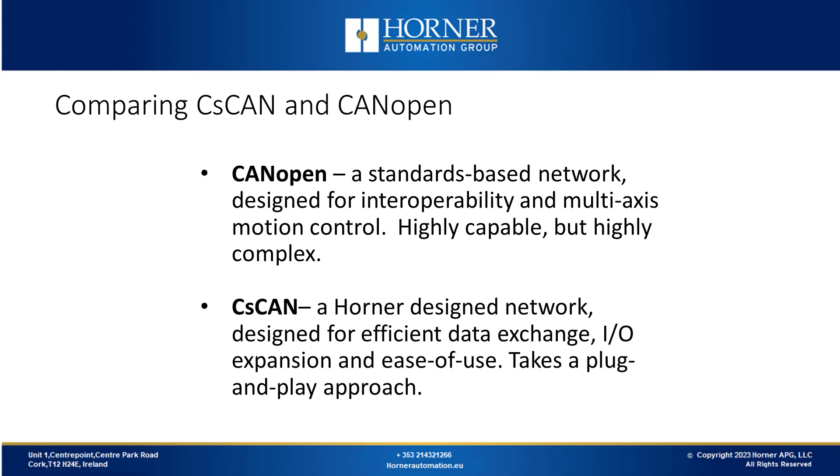CANOpen is a standard communications network that's based on the CAN chip. There are plenty of networks based on CAN, for example J1939 in mobile and automotive applications, and there's also the Horner CsCAN network, which is used for adding I/O to OCS or having OCS communicate with each other over the network. As we compare CANOpen with CsCAN, we can see that they were designed with two different things in mind, as CANOpen is a standards-based network focused on having components from multiple manufacturers talking to each other, whereas CsCAN was focused on getting Horner components to connect as easily as possible, a plug-and-play approach.

Now we'll look at the benefits of CANOpen with OCS. Interoperability is the main focus of CANOpen, so if you have a sensor or an encoder or a smart motor that you want to communicate to, CANOpen would be a good choice. It's good for motion control because it has a lot of capability at a fairly low cost when you compare it with other networking choices. If you're looking at adding I/O to an OCS or having OCS communicate with each other, CsCAN is the best choice as it's plug and play.

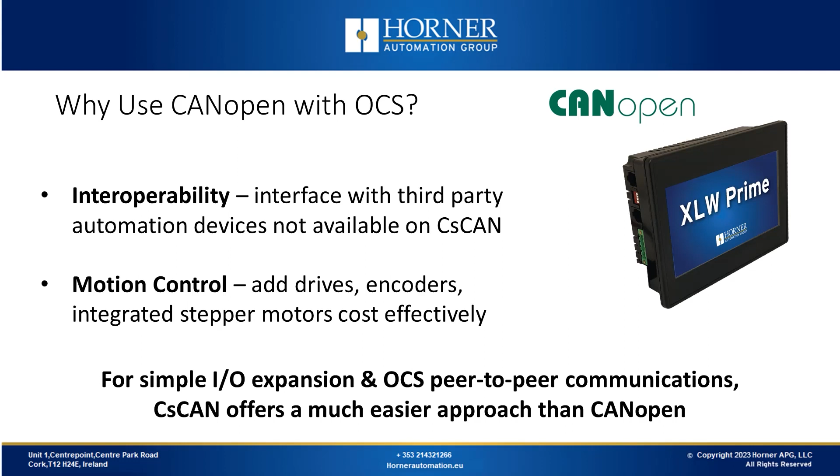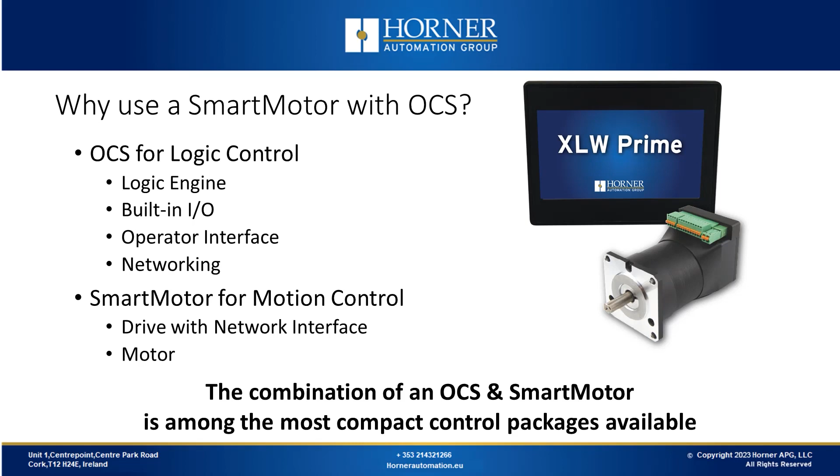Now we'll look at why a smart motor and an OCS work well together. If you take a look at the level of integration on an OCS, there's a logic engine with built-in I/O, operator interface and networking in one compact package, all configured with the same software package. If you look at smart motors, there's the motor and the drive with the networking interface, all built into one component. It's also highly integrated. So it doesn't take a lot of complex integration to interface these two components and to provide a complete system with a minimum of components.

Now we'll look at the different options when interfacing a smart motor with OCS. You could use the more old-fashioned step and direction approach, or you could go with a Modbus serial approach. These are both cost-effective and will both work well, but if you're looking for the next level of performance, CANOpen would offer that. There are some other options as well. In some cases, these other options might seem a bit easier from a configuration point of view, especially when you're talking about Modbus TCP. However, those options generally come at a premium. When you look at smart motors, you'll find the Ethernet options are more expensive than CANOpen.

The two CAN-port versions of the XL series OCSs, like the XL7 and the EXL10, support CANOpen as standard and have done for years. So if you have an EXL10 or an XL10 Prime, or an XL7 or an XL7 Prime, those have CANOpen available on the second CAN port. You can order CANOpen as a factory option for all the XL series and XL Prime series products that have a single CAN port. That's also true for the X5, which currently is the only micro series product that supports CANOpen.

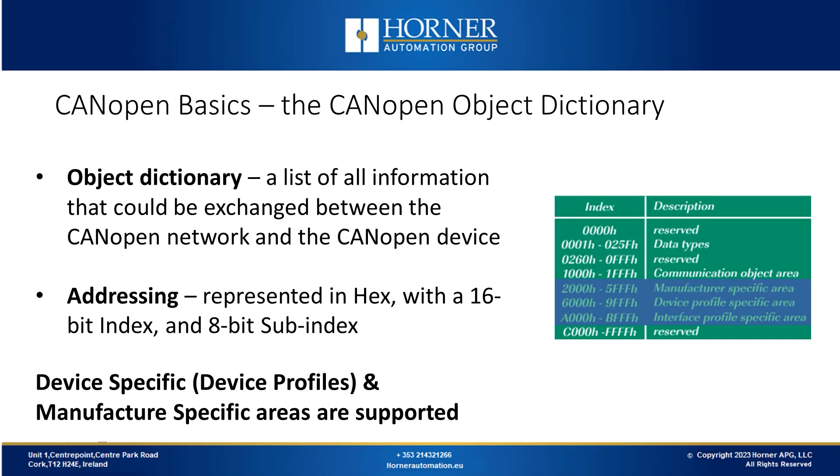Now we'll look at some of the CANOpen basics, starting with the object dictionary. The object dictionary is just a list of parameters. A lot of variable frequency drives that, for instance, have Modbus support will have a list of their parameters along with a list of Modbus addresses. One thing that's a bit different with CANOpen is that it uses hexadecimal addressing, and it's not just an index, which is the equivalent of the address, but it also has a subindex, so it's organized a bit differently.

Now we'll look at the different protocol types that are available as part of CANOpen. Starting with network management, which is a way for the current state of the network to be managed. It's usually managed by the master on the network, which in this case is the Horner OCS, but the network state can be one of several choices. When a network comes up, it's in the initialization state, then it's pre-operational, then it goes operational, which is where it does most of its work. And then if something goes wrong, the network will go down and be stopped.

Heartbeat protocol is used to determine the health of individual nodes. So that's a protocol that's used over CANOpen for that purpose. And then there are different types of messages that are used to exchange data. There's a service data object, or an SDO, which is the message structure that's used to transfer messages as needed. So they're not sent on a continuous basis; there might be a parameter and you need to change that on an occasional basis, then you can use an SDO for that.

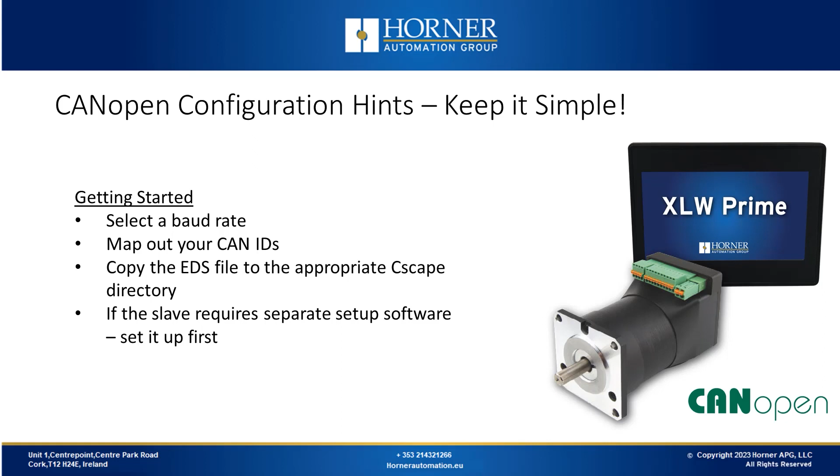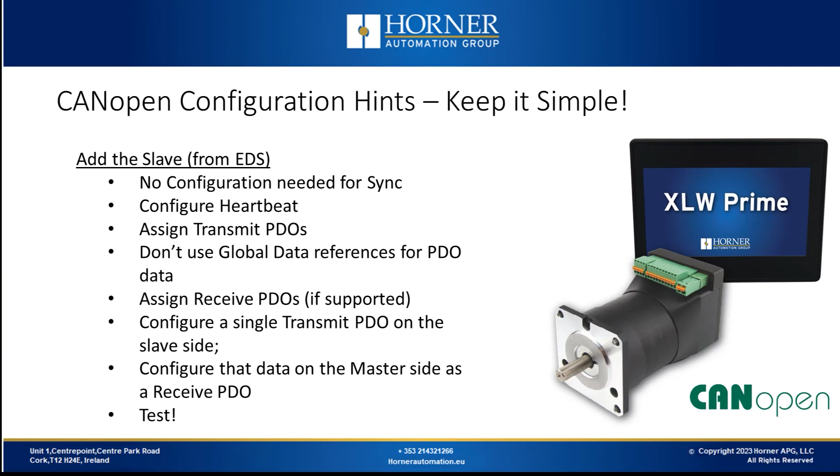Firstly, select your baud rate and your CAN ID. Map those out, and you're going to make sure you get your EDS files gathered up and copied into the appropriate directories. If your slave that you're configuring, like a smart motor, has its own software for configuration, you should handle that first. And then once you go into CANOpen configuration on the OCS side, which uses Cscape, then you're going to have a series of steps we're going to go through. And we'll demonstrate those for you here in a minute. And again, the key is to configure a certain number of items and then do the testing.

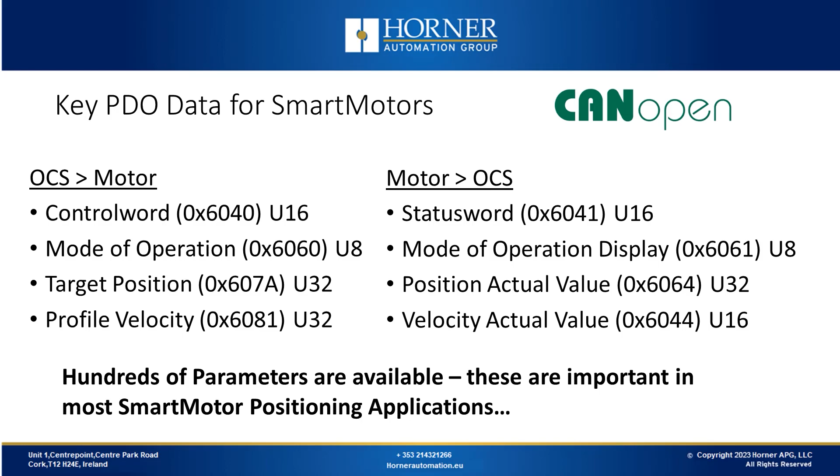Now with smart motors, because there are standardized profiles available in CANOpen, one of the advantages is that a lot of the data addresses are standardized. So when you're talking about interfacing an OCS with a smart motor, especially if you're talking about positioning control, maybe you're going to move an object across the x-axis or something like that, then you'll find that the data is going to be the same from application to application. So what we have here is some of the data that is going to be important for a typical positioning application. With CANOpen now, there are hundreds of parameters available, and we're looking at the ones that are most requested and most required. Now we'll go into Cscape and we'll look at how to configure a smart motor.

Here we have an already configured application which we'll review shortly, but first we'll open a new application, and we'll look at how to do this from scratch. So we select new, then we use a register-based approach for this example. So we have a new application that's blank, and we're going to start from the configuration area. We're configuring an XL7, and one of the advantages of the XL7 is that you can have CANOpen support available as standard on port 2. So we'll select CANOpen on port 2 and press the configuration button. And now the OCS can act either as CANOpen master or as a slave.

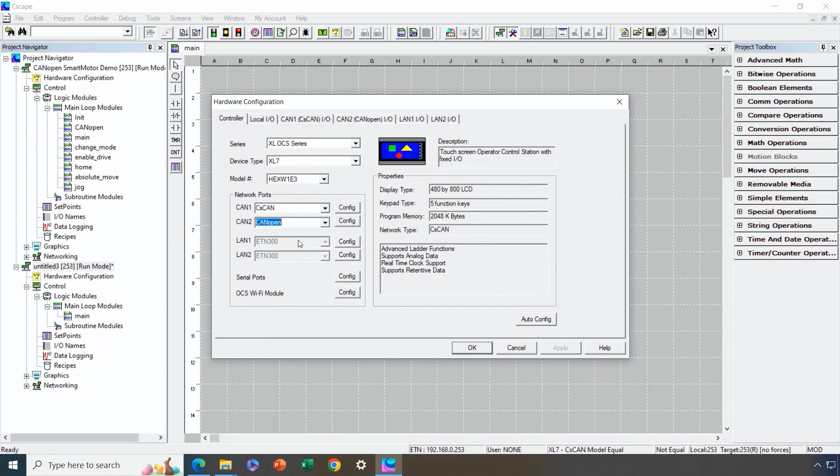And when you're dealing with a smart motor, the OCS is going to be the master. So we'll select that. And then we get into the configuration. So we'll start by configuring the OCS as a master, and then after we get to a certain point, we'll add in the slave, which will be the smart motor.

We recommend that you use the defaults for ID and baud rate for the slave that you're using if those will work for you. So the default with the Nanotec SmartMotor is an ID of 1, which means we don't want the master to have an ID of 1. So we'll assign 127 as the master ID. The default baud rate for the motor is 1 megabit, and if the network is less than a few meters, that's not going to be a problem, and this network is, so we'll do that as well.

For configuration, we'll just look at how generally you're going to configure the minimum. So one thing we'll check is the perform NMT, which is the network management that we talked about. So the OCS as master is going to be responsible for the network state, and so we want the OCS to automatically start the network to put everything into operational mode. So we make that check mark.

The only other thing we want to configure here is a status register, so we'll assign %R1 to that. We're using register-based logic here and will require 4 consecutive word type registers for the master, and then for every slave there'll be another 16-bit word as well. Now there are lots of other things to configure, so we'll go through that now. Under device type, that's just informational and there's nothing to configure there.

For special function objects, we only need to configure this if we're going to use the sync protocol. Remember, the sync protocol is an optional approach where the master can send out a sync pulse periodically that all PDO messages are timed with. So here we want the master to generate the sync message, then all that is left for us to configure is how often the sync message goes out.

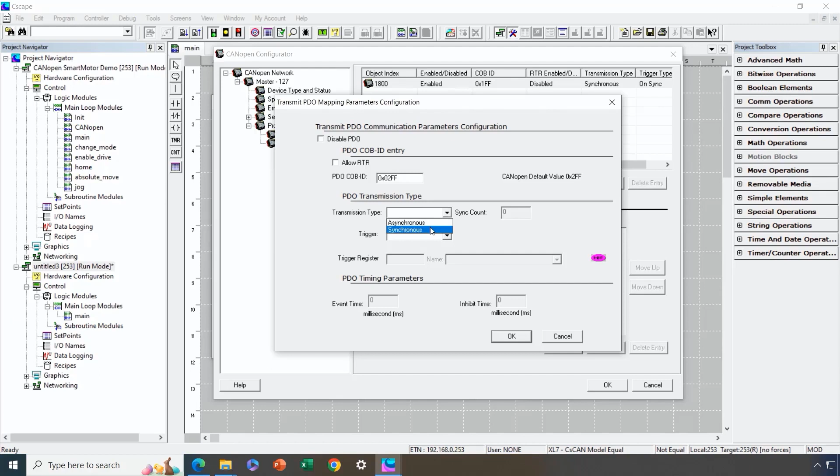Now we'll add the SmartMotor, so we press the Add Slave button here, and then that starts the slave configuration wizard. The node ID of the slave is going to be node ID 1, which is the default for the SmartMotor. Then we'll load the slave from its EDS file, which we've previously loaded into Cscape in the appropriate directory, and so we'll utilise that. So we'll press the next button here.

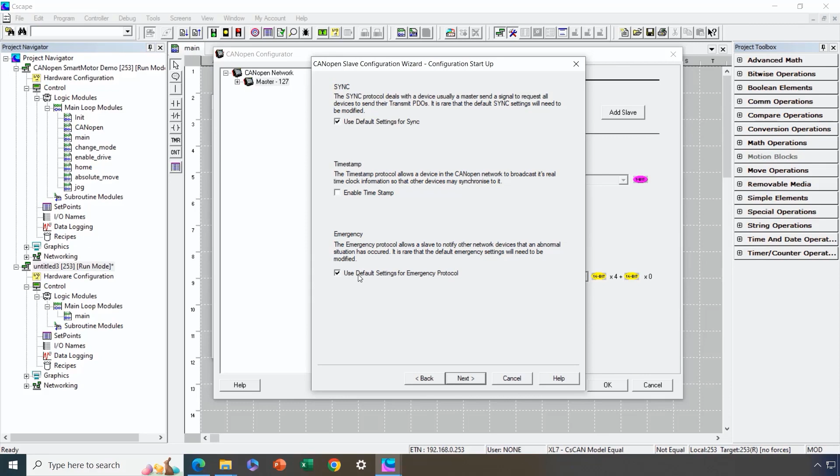So we want to use the default settings for sync, and we don't want to do anything with timestamping. The default settings for emergency protocol are also okay. And then from a heartbeat standpoint, just like the master, we'll have the motor generate a heartbeat every 500 milliseconds, and we'll check from the master node, which is 127, to make sure we receive a heartbeat at least once per second. So that's how we want to configure the heartbeat monitoring.

So we want to have the standard object IDs supported for SDOs, and then we do want to have a couple of transmit PDOs with the motor, so we'll set that at 2, and we could go up to 4.

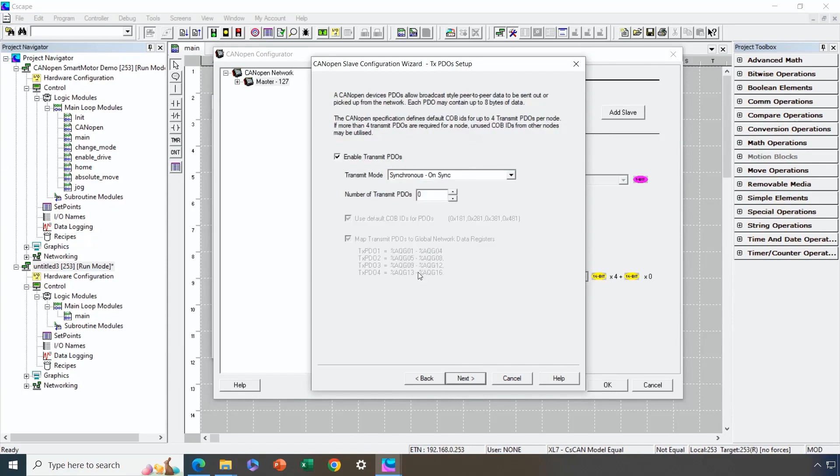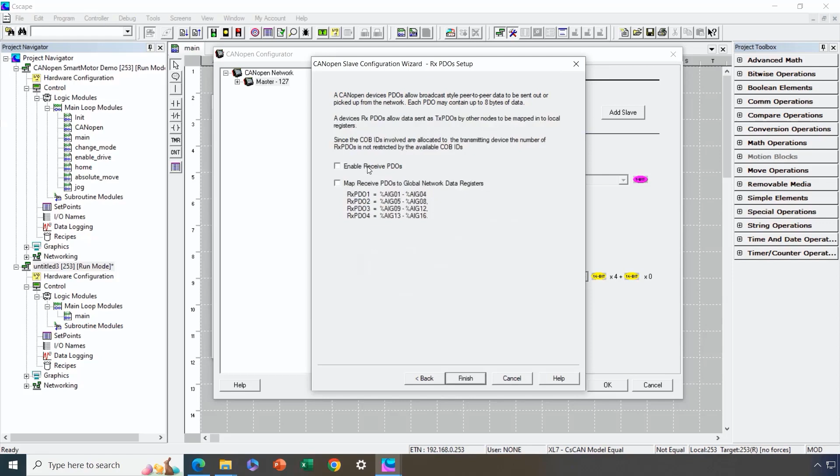We'll use the standard object IDs again as much as possible. For mapping data back and forth, we prefer to just use standard %R registers rather than global mapping, so we'll uncheck that option. We do want to be able to receive PDOs from the master. In this case, remember, we're configuring the SmartMotor. And again, just like on the data going the other way, we usually like to avoid global data. So we'll press the Finish button now.

So once the EDS dialog pops up, now we can select the manufacturer of the device we're adding, and that's Nanotec. The device is the PD4, and profile is the only one available here, so we'll say OK, and now the Nanotec SmartMotor has been added. So now we'll configure the details for that. Firstly, we'll make this a mandatory slave, which means if the slave is powered down, we won't send the CANopen network into operational mode because there's no point as a critical slave is not up and available.

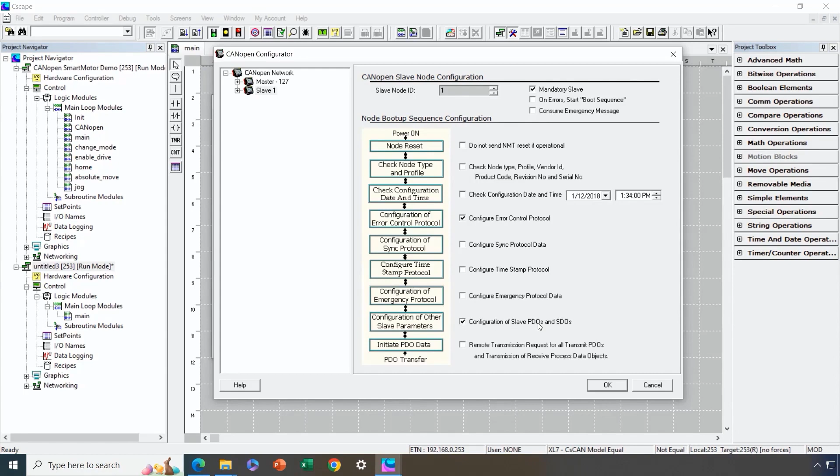Up here are all the different services which could be enabled. The only ones we'll enable are the error protocol, the PDO and the SDO configuration. This means that we're able to, from Cscape, tell the SmartMotor what data we want to exchange using PDOs. So those are the only two we'll configure on this page. And just like the master, there are other pages to configure. So nothing here on device type as it's just informational.

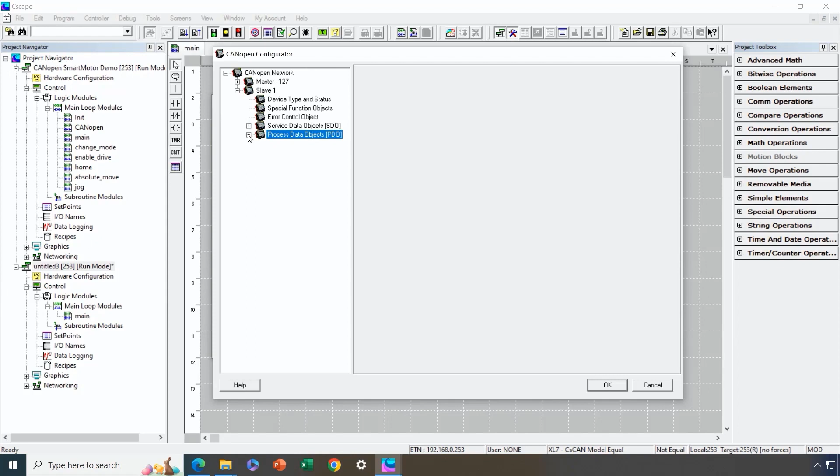For special function objects for the master, we had to configure sync, but as a slave, we don't have to configure anything. Error control object is already set up because the wizard set it up, so we're generating heartbeats every 500 milliseconds, and we're checking to make sure the master, as node 127, has sent us a heartbeat at least every 1000 milliseconds. There's nothing to configure under service data objects or SDO messaging. Now we'll look at the PDOs.

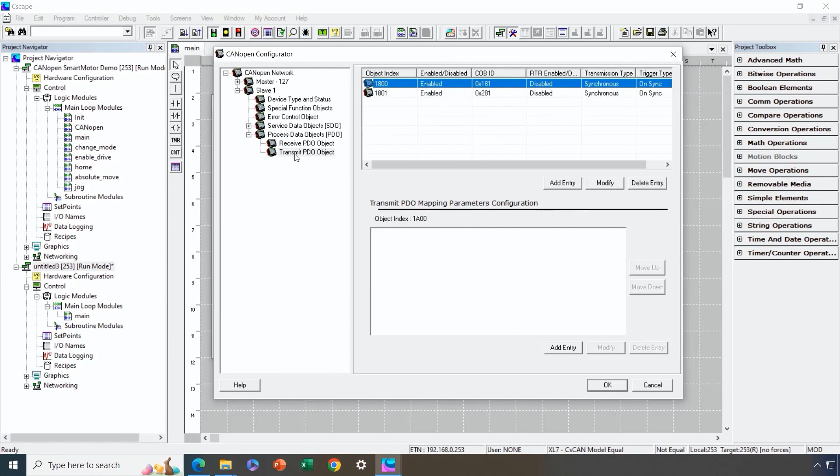So under the transmit PDOs, we have said in our wizard configuration we want two transmit PDOs, and there they are. So we'll start from there to add the details as to what motor parameters we want to transmit from the motor back to the OCS. We'll start with the first PDO message, and every PDO message can have as much as 8 bytes of data in it, so if we keep our data below 8 bytes, it will all work. So looking at the first PDO again, this is the data that the motor is going to transmit and will be received by the OCS in a %R register. So we highlight the first PDO and press Add Entry.

And now, because we're talking about the SmartMotor, we can press the Set from EDS button and we can see all the motor data that's available for us to transmit back to the OCS. We'll start with our status word, which is 6041, and that's the hex address. We can see that's an unsigned 16-bit value, so we need to make sure that matches here and we can say OK. The next one we'll add, we'll choose the current mode of operation that the motor is in because we want to verify that it's in positioning mode or find home mode, and so that is parameter 6061, and we can see that it is a signed 8-bit value. Now we need to change this to a signed 8-bit value, and now we configured this PDO in terms of what data is being transmitted.

Next, we'll do the same thing for the second PDO. We'll add an entry this time, and we're going to add the actual value of the position. So the SmartMotor's actual position is 6064. So we'll scroll down for that. Here it is, and we see that it's a 32-bit value. So we must set signed 32. And then the final one we're going to send as part of our demonstration today, we're going to send our actual velocity, which is 6044. And when we get to that, we can see that it is a signed 16-bit value. So again, here we pick the data that we want and we make sure that the format is appropriate. So this is the data, and it's going to be broadcast through a PDO message back to the OCS.

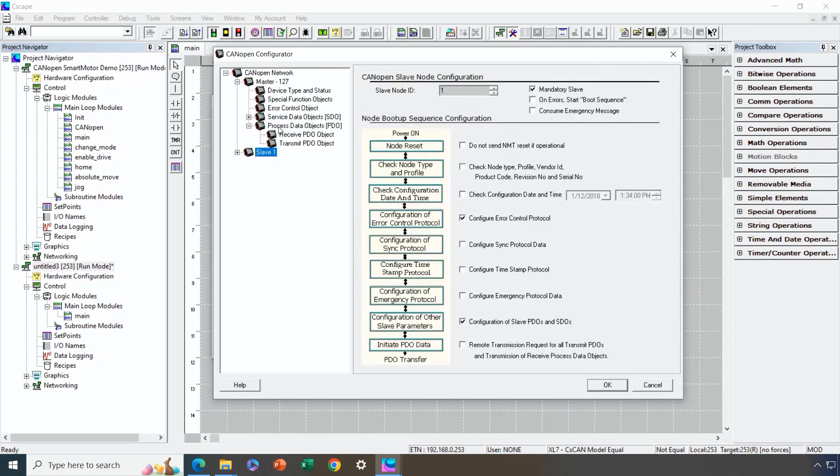So now we need to go back to the OCS, which is the master, and go to its receive PDOs, and configure where in OCS memory we're going to map this data coming in from CANopen. So we start by adding receive PDOs, and then we press the Add Entry button when we get a choice of which we want to add.

So the OCS itself is going to be transmitting 2 PDOs, but we don't want those, and the slave is going to be transmitting 2 of its own. So the first transmit PDO from the slave is going to correlate to the first receive PDO with the OCS. This 2 does not indicate node number 2, it just indicates that the slave is second on the list after the master. We'll press select here, and then we'll add the second one again.

Then, one by one, we'll map where the data coming from the CANopen slave from the SmartMotor is going to end up in the OCS memory space. So we highlight the first receive PDO because that's where the master is receiving the data. Then we press add entry, and we don't use the set from EDS button when we're just mapping data back into the OCS. All we do is type in the register address number where we want the data to come in, and then we make sure that we get the type right.

So the first thing that's coming back in is the first PDO and the status word, which is coming back in unsigned 16-bit format. And we'll choose to receive that data into register 1001. So all we do is type in register 1001 and make sure the format is right. And for the second parameter that's coming in that PDO, that is our mode of operation display, which is a signed 8-bit value. So we put that into %R 1002, and we make sure that we have signed 8-bit selected here, press OK, and then we'll finish this receive PDO as follows.

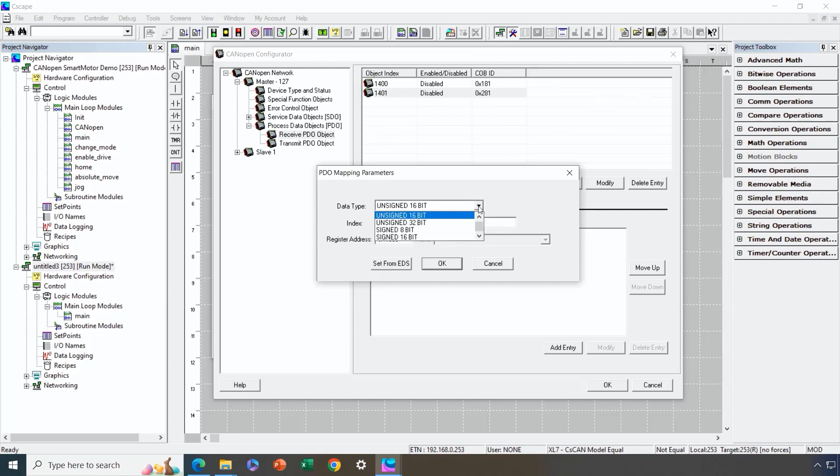So we'll add the entry here, and the actual position is a 32-bit value, but we put that into %R 1005, and we can put it wherever we want if it doesn't conflict with anything. That's going to be an unsigned 32-bit. And then the final one we add is the actual velocity that's coming in as a 16-bit unsigned. We'll put that into %R 1007, and 16-bit unsigned is still correct. So that's how we had to configure data being transmitted by the slave and received by the OCS as master.

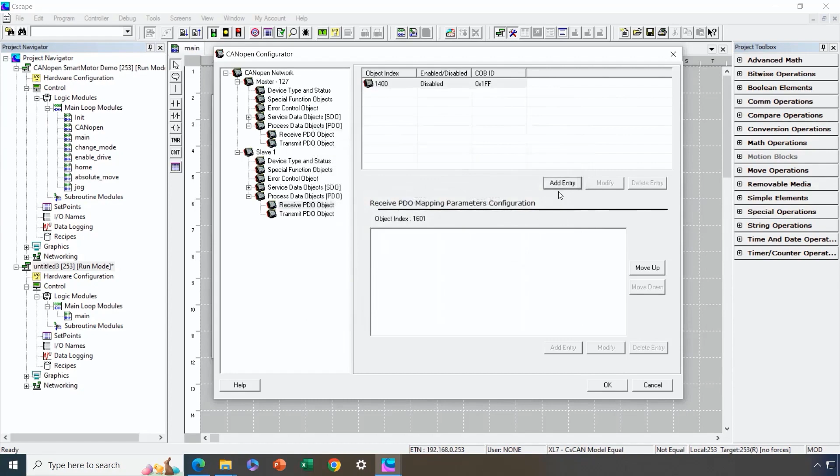Now we need to transmit data from the OCS and we need to send it to the slave. We'll start on the slave side. So that will show us the data that we want to transmit to it. So we go to receive PDO on the slave side, press add entry and select the master's first transmit PDO, and then we'll do the same for the second one of the master's transmit PDO. Then we'll determine what data we want to receive into the motor.

The first thing we're going to receive is the control word, so we'll set from EDS, and then we're going to find the control word, which is 6040 unsigned 16-bit. Next, we'll configure the mode of operation that's being commanded to the motor, which is 6060, and that is an 8-bit signed value. Next, we'll go to the second PDO. We can see that with each of these PDOs, we've been well below 8 bytes of data as we haven't filled them up, but we just want to establish and put some data in a few PDOs. Now we'll configure the second receive PDO on the motor side.

The next piece of data we want to receive from the OCS is the target position, which is 607A, and is a signed 32-bit value. You can look these addresses up in the user's manual. And then finally, we'll receive in our profile velocity, which is 6081 and is an unsigned 32-bit. So make sure we have unsigned 32 configured, and there we go. So this is the data we're receiving in from the OCS that tells the motor how fast to go, what position to go to, etc.

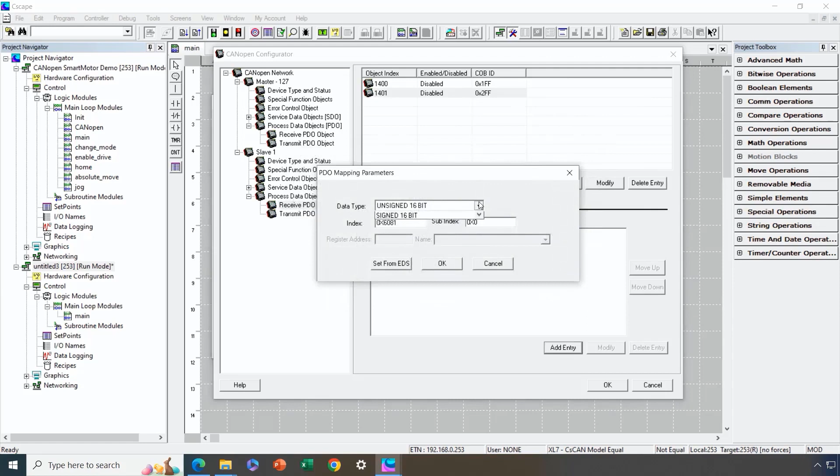So the final part of the configuration here is we're going to the transmit PDO of the OCS to configure which registers the data that we just configured in the slave is going to originate from. So we select the first transmit PDO for the master, and this is the control word unsigned 16-bit. We're deciding as part of the application network map we'll have this transmitted from register 1011, and then next we send our mode of operation, which is signed 8-bit, and we'll originate that from %R 1012.

Next we have our 2 pieces of data to send from OCS to the motor, and that is the target position where we want the motor to move to, which is an unsigned 32-bit, and we'll have that originate from %R 1013. And then finally, we have the profile velocity or the velocity command, which is an unsigned 32, and we'll send that from %R 1015.

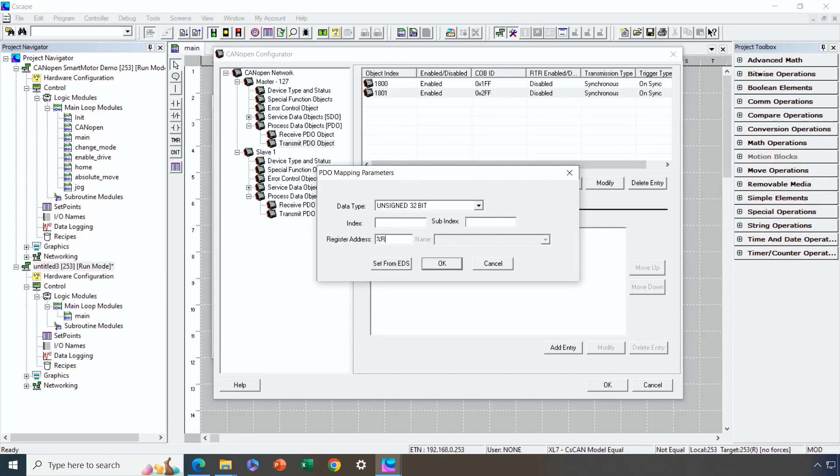So now we're basically configured, and it's a long process, but if you do it systematically, it's just a matter of following the steps in order. There's one last thing to do, and so we'll go back up to the master configuration. And then, under the error control object, we'll make sure that the heartbeat monitoring is the way we want it. So we're generating a heartbeat every 500 milliseconds.

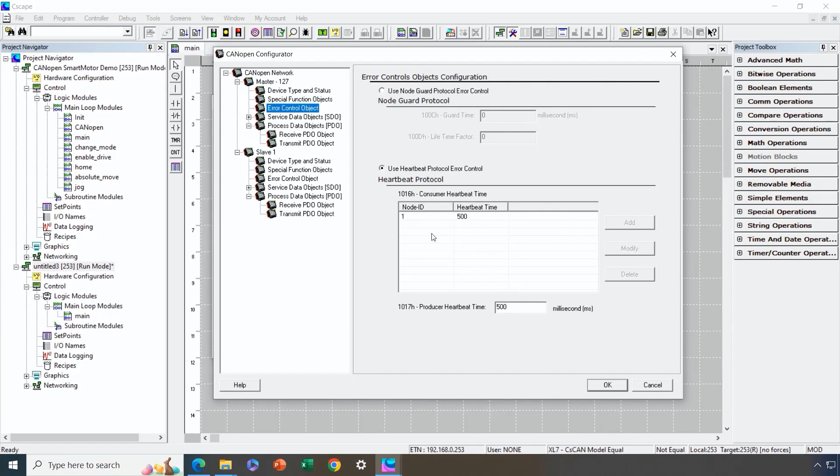At the time we configured this, there was no slave. Now there is, but we don't want to monitor the slave heartbeat every 500 milliseconds. We want to monitor it every 1000 milliseconds instead, because if it's a little bit late, we don't want to throw a flag. So now we're done with the configuration. So again, that's the process to go through for a SmartMotor. If you have a positioning application, you can follow the same steps.

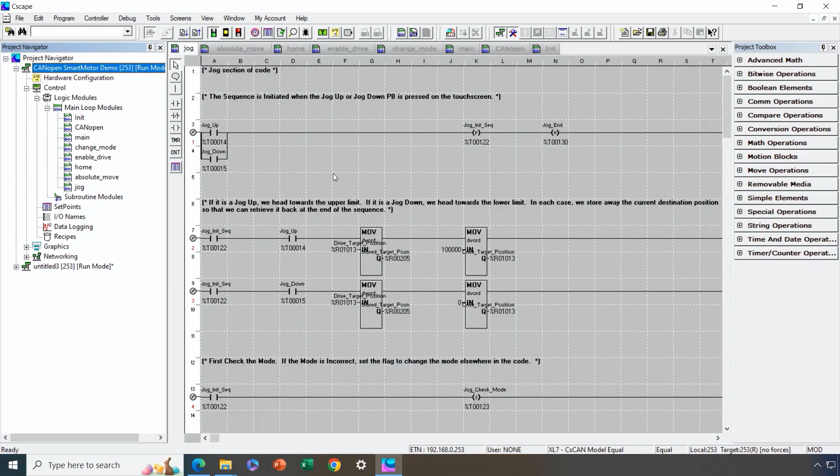Now we'll see another option. So we'll show you an application that was previously created. Now we'll look quickly at what these different pieces of logic do. So here we're looking at an initialization section. We have a CANOpen section where we have the standard state machine for CANOpen that every CANOpen smart motor and servo drive is going to follow.

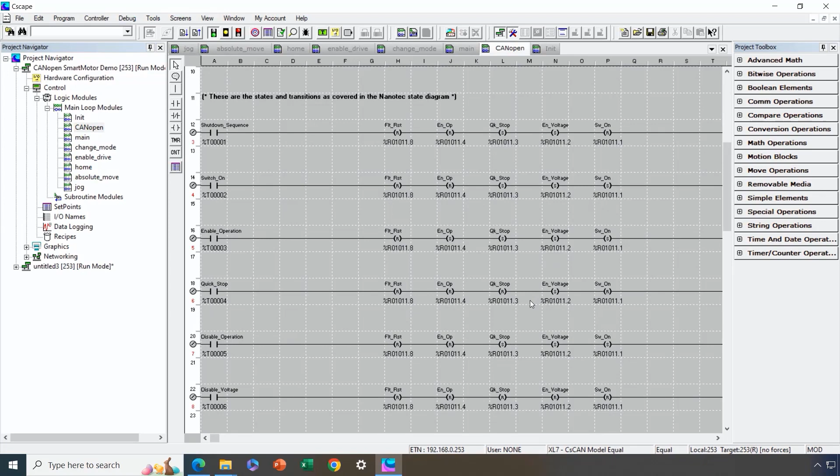Also in this section of code, we give you the ability to send and receive SDOs. So if you have a parameter you want to change from the screen of the OCS, just occasionally, you could do that. And then we also have logic in here that's decoding the status information coming back from the OCS on CANOpen, so you always know the status of the CANOpen network.

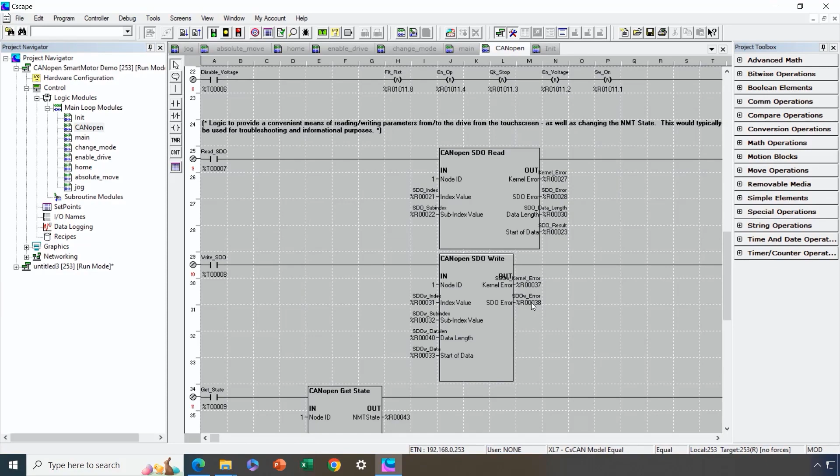The main section is where you would put your logic, and we also have a change mode routine, and there's an enable drive section, because if you want to move a motor, you have to make sure that it's enabled. There's a find home routine, there's logic in there for performing absolute moves, and then there's also logic here for jogging. So everything is very well documented.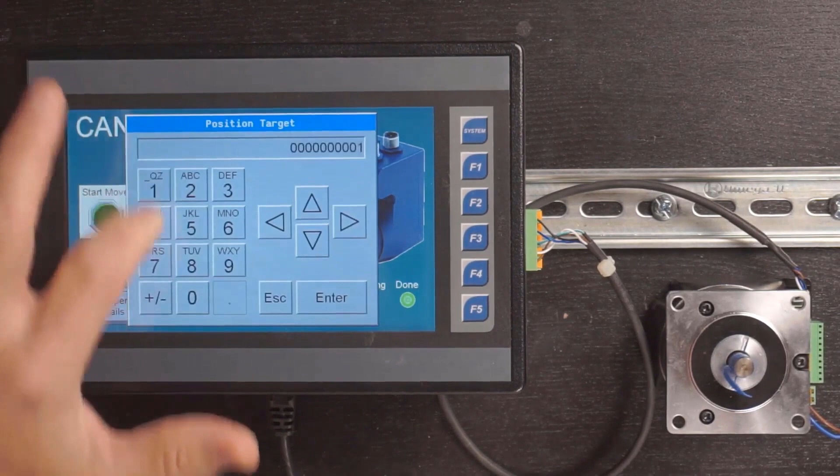And if we went to a million counts, we'll be moving 500 different revolutions, and moving a bit quicker because we got past the acceleration time there. So that's the simple demonstration that we're doing for simple positioning. In addition to this screen, which is to help you test your result, there's also a detail screen here that you can look at.